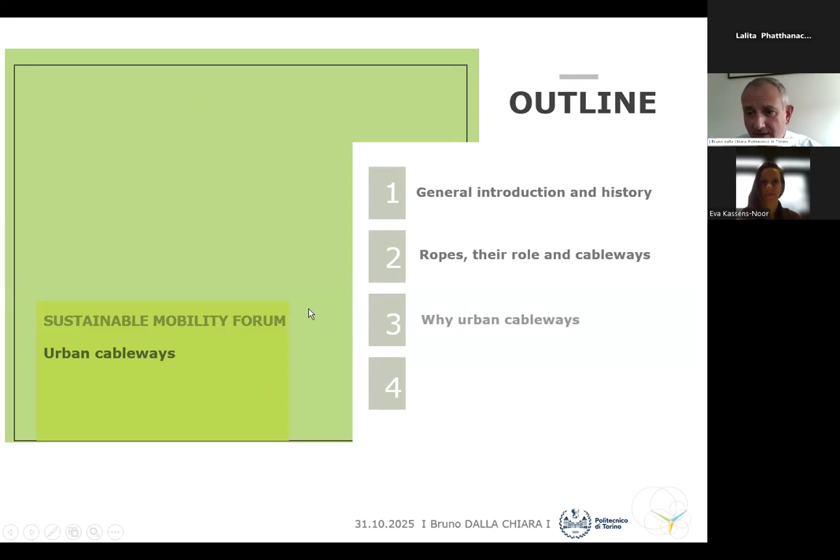The outline of today is a general introduction and history on cableways in general, then the ropes, their role and cableways, then why urban cableways, and their design. As regards the design, we will see just some first steps, because of course in this available time we cannot enter into the full engineering and design of cableways, but I will provide you some first glimpses on how their design is done.

So first of all, why should we look at urban cableways for sustainable mobility? First of all, the use of space. Our cities have difficulties sometimes to find more space, and anyway the available space is usually quite occupied by road vehicles. Then there is a question of safety, because we did not have this problem a century ago, and though we have made some improvements in our cities in the last two decades, road deaths remain one of the first causes, or the first cause, of death in our countries. So we have to look at that.

Then a third element is hourly capacity, because if we look at the alternatives nowadays, if we put aside for the time being the automated metros and conventional metros which have very high capacities but need the demand for them, then if we go underneath 10,000 passengers per hour per direction, then we have some alternatives, among which there are urban cableways.

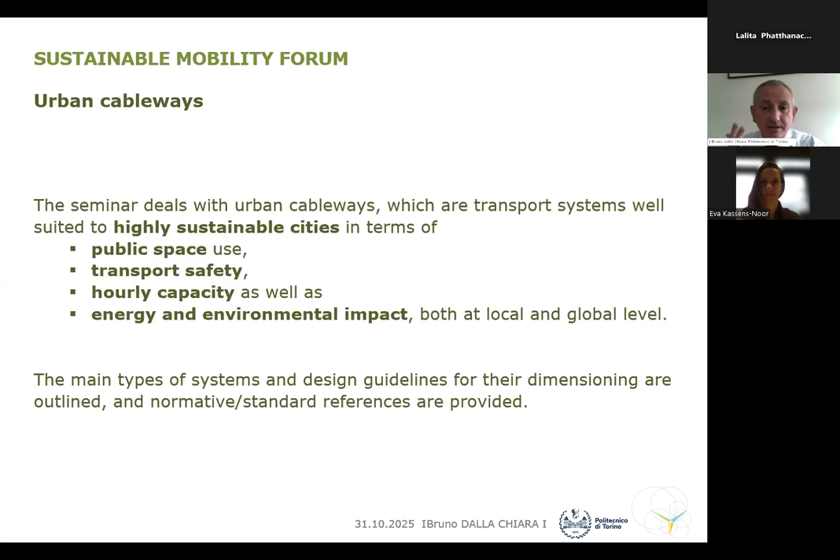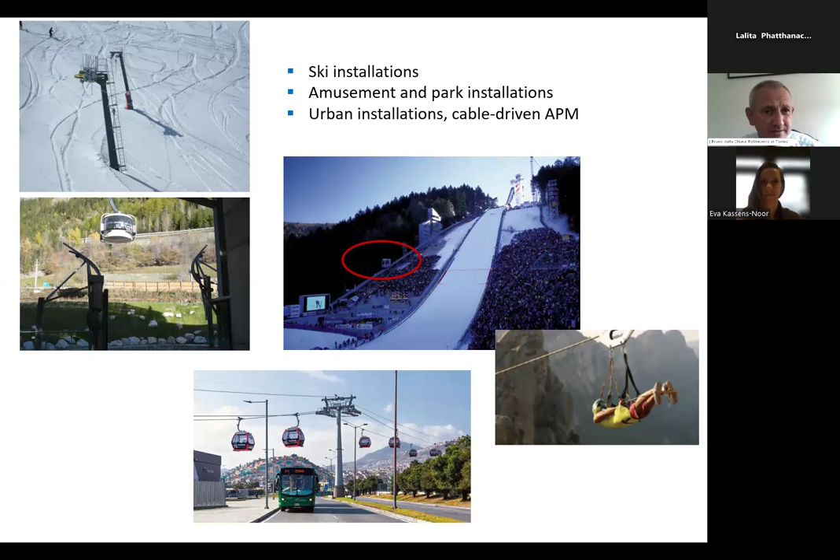Let's start from a look. We know cableways for their use in sport activities, and we know a bit less probably their application, as we can see in this slide, for urban applications. But as we will see shortly, there is already a number of them. We will concentrate on this, of course.

First of all, when cableways were born, because we have a history behind us, they were born more or less in the same period as railways, so in the first two decades of two centuries ago. In this context, in 1822, there was a first typology, a freight rope installation that was built in Verona, Italy, but soon after in Vienna, then in Germany, then in Sweden, in the 20s and 30s of two centuries ago, some applications were born.

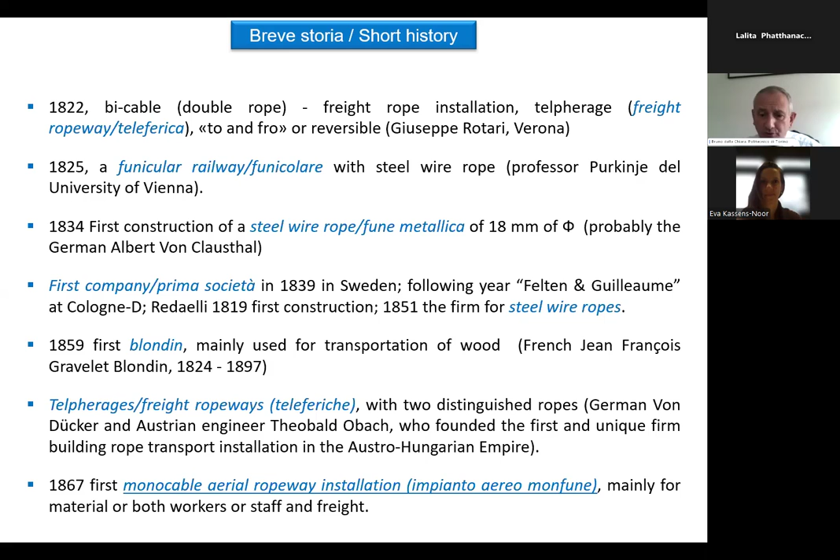In the second half of two centuries ago, some first Blondin installations dealing with freight transport, in particular of wood at those times, were installed in France. Then, starting from the 60s and 70s, we have seen the diffusion of cableways also for passenger transport. The first one was in 1866 in Switzerland. As you can see, the main countries are Germany, Switzerland, Austria, France, and Italy, which were the places where cableways were born, and still conserve a strong competence on them.

Then, as I was saying, in the two centuries ago, mainly in the first half of the last century, there was the diffusion of cableways for passenger transport, also starting from the 20s of funiculars. That means those cableways which are operated typically either on rail or on air cushion. For example, in Zurich there is a cableway for the airport operating on an air cushion, with the traction assigned to the rope. Then starting from the 80s, we have some first cableways that we will see later.

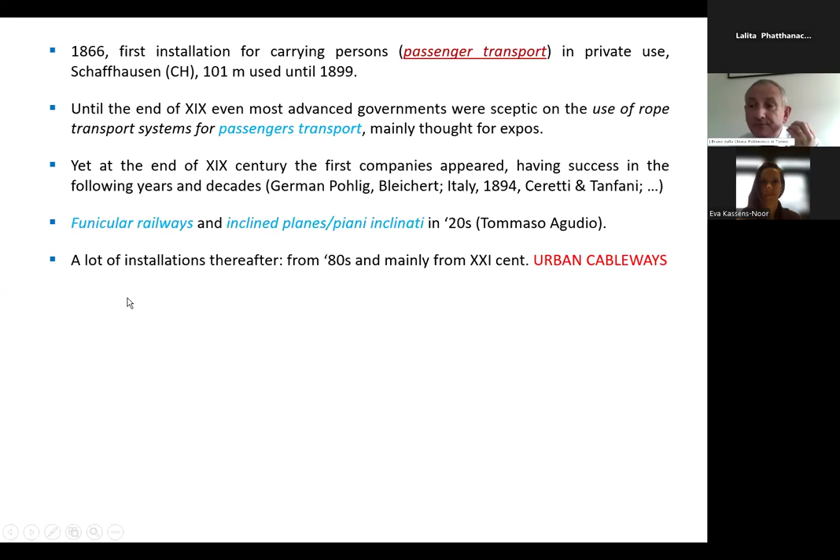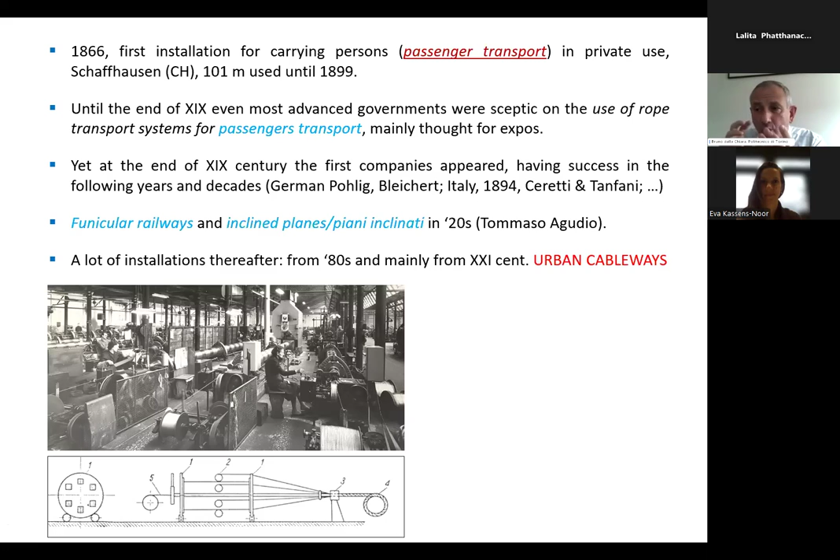This is an old company, where the ropes were made. Now the process is a bit more modern, but we still need to know how the rope is made. We start from the steel, and then, as we will see later, we arrive to a rope itself. Then let's see a short history — these are the very first aerial ropeways for passengers, from the 20s and 30s.

As you can see, there are a lot of aerial tramways already in the 20s and 30s, beside gondola ropeways. Then we had also some sledding on snow that allowed bringing skiers uphill. But there was already, as you can see on the left side, an urban cableway in the 30s.

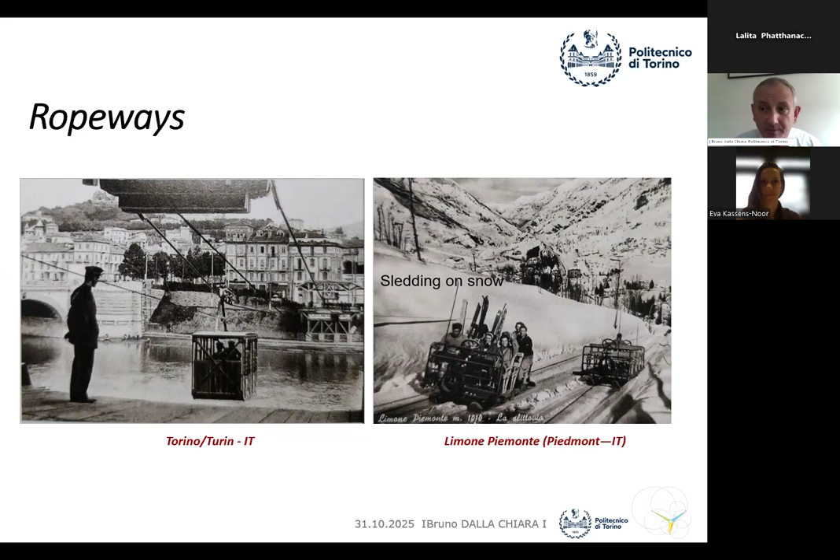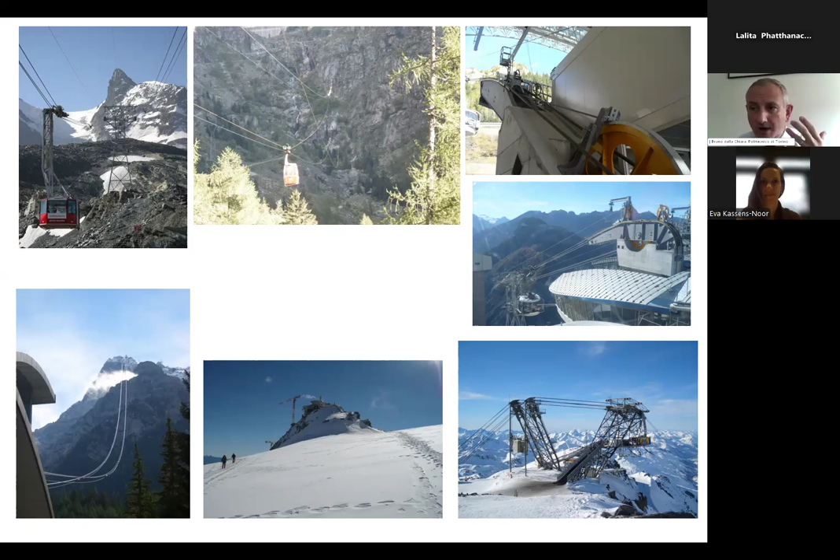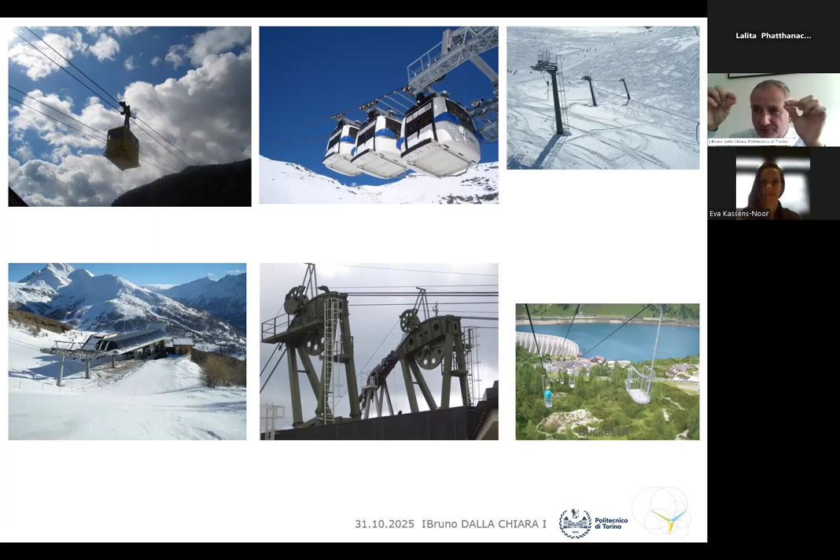As we can see here, we have different kinds of cableways that shortly we will analyze. Also the pulse, this one in the middle of the top of the slide, is a pulse. That means you have groups of vehicles which are carried together to avoid the concentration of strengths in the same point of the rope.

And now we arrive to urban cableways. So we have seen a short history, and we see some cableways operating in cities. On the top left, this is the urban cableway in Venice. It's a to and fro cableway that is represented on the bottom left of the slide.

Then on the right side, on the top, you have the one operating in Zurich, in Switzerland, for the airport. The traction is assigned to a rope, but also you can see this one in the middle part of the right side of the slide, that is in Milan, for the conjunction of a metro system with a hospital, with a very high traffic. It's always full. I've been there more than once, and it's typically always full.

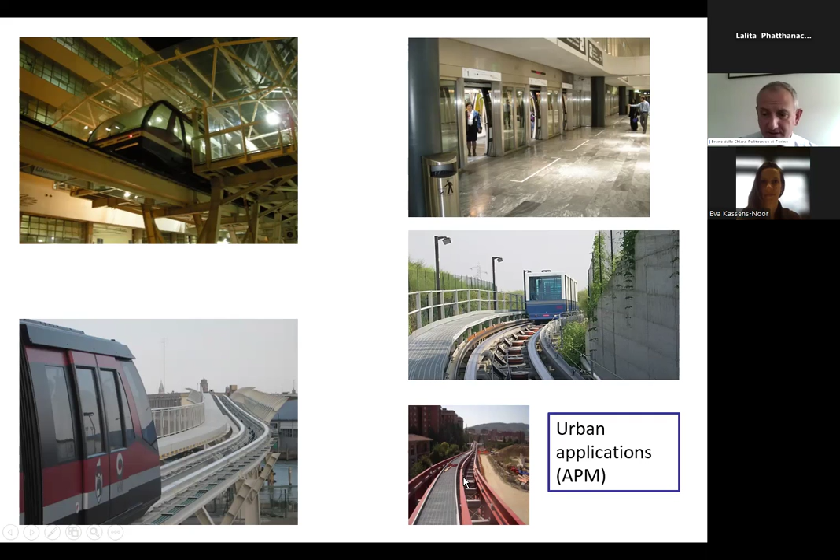And here on the bottom, there is the one in Perugia in Italy, that is an urban cableway too. But the main cableways in terms of numbers in the world are those that have been built recently in Latin America.

As you can see here, you have Metrocable in Medellin, you have Mexicable in Mexico City, Teleférico in La Paz, Bolivia, Transmicable in Bogota, and they have been increasing in the last 15 years. Typically, they are aerial ropeways with the concept of gondola ropeway.

Of course, we are dealing with cities which have not a high level of historical buildings. I mean, they don't have to respect buildings of the 11th, 12th, 13th, 14th centuries. They are more recent, but they don't cost much. They avoid going underground, and they can link in an easy way parts of the city.

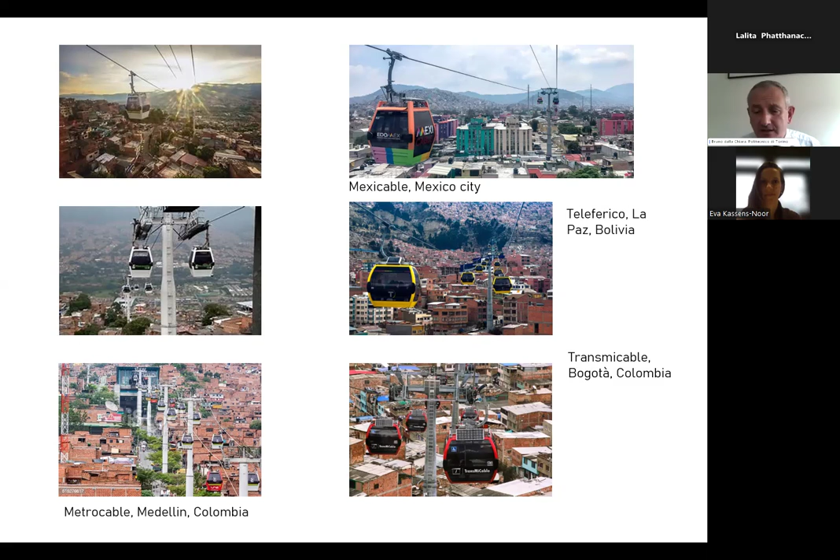In a city like Medellin, they have, if they have not increased them recently, 8 gondola ropeways all connected together which satisfy a great part of the demand, and they have built their public transport on this concept.

Consider that in the world, this is the representation of cableways for all applications, of course, not just for the urban context, which are just a few for the time being. There are 16,000 in Europe, which is where cableways have been developed and are still the main core of the industry in this context.

Because there are 2 companies which are big, plus a few which are little, which have 90% of the overall market in the world. So concentrated, very specific, but with an outreach at global level.

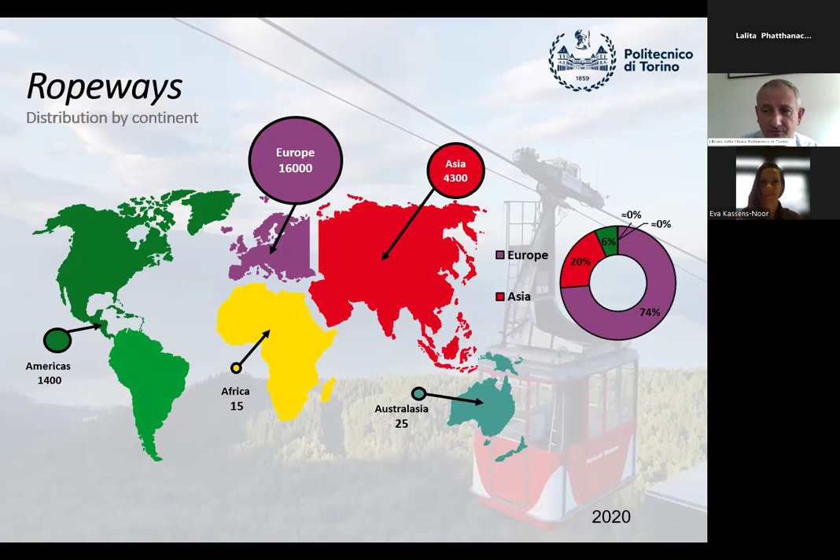In Asia, we have more or less 4,300 installations, many of which are in China, and then some others in the other parts. In Americas, there are only 1,400, but already some tens in the cities.

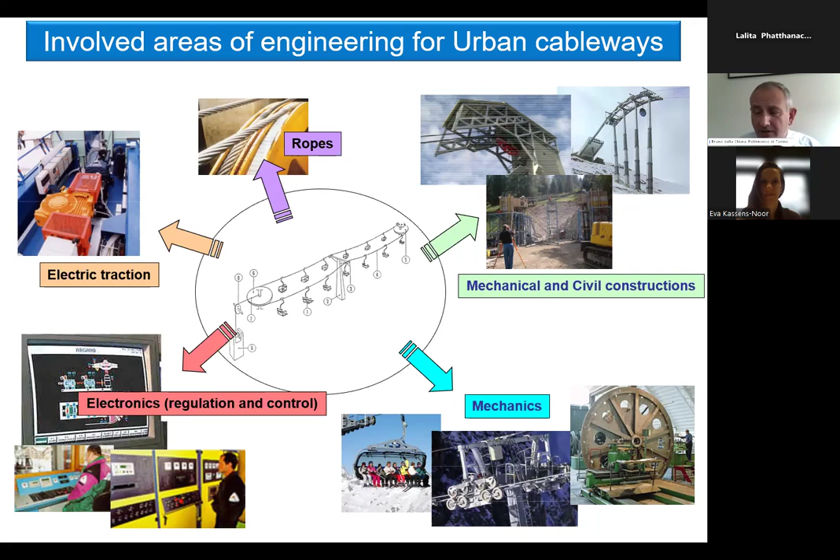Cableways typically involve a number of engineering areas: the ropes themselves in mechanical and civil engineering, electric traction, electronics, mechanics, and the buildings. So they require a system engineering approach, with also some aspects in the architectural field for the stations, their insertion in the country or on the land, and the like.

Let's start from the rope, just a very short introduction. The rope is made by a core, then there are the wires around the core, and then the strands, which when spun around the core or the internal central wire, constitute the rope itself. I won't go into construction details, but you can have different kinds of ropes, different constructions, different diameters of the wires, and also with or without the core. It depends on the application.

The core is useful for the flexibility and for the lubricants for the rope when it is in operation. But you can avoid it - you cannot have it - when you have more rigid ropes, typically for allowing the load to go from one point to another. We will see it later.

Which are the main construction parameters? This is important because it will be part of the multiple choice test. You need to know, for a rope, the diameter, the winding direction - how these wires are wound - the strand pitch and winding angle, the loss factor per spin, which is more specific, and the minimum breaking load, which is important for calculating ropes and ropeways.

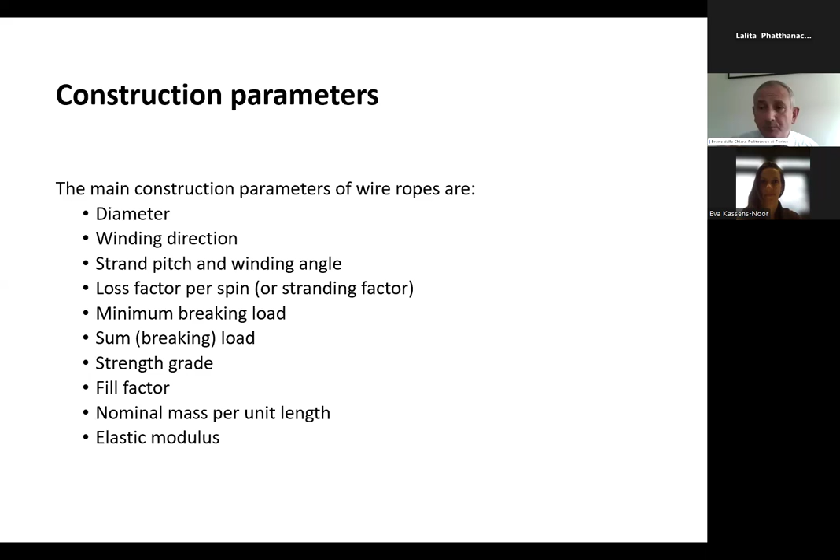The sum breaking load is a similar way for calculating the breaking load, the strength grade, that is the safety coefficient, the fill factor, which reveals how much of the section of the rope is filled with metal, with steel, the nominal mass per unit length necessary for calculating rope weight, and the elastic modulus for the extension of the rope in different operational conditions - weight and temperature mainly.

Which kinds of ropes do we have? A number, but the main elements you are asked to know are these: the carrying rope, that is static - it brings the weight, but the weight moves along it. Then the hauling rope, that is the one which is moving. But if you have just one rope, that is a carrying hauling rope.

That means you have the weight and the traction together in the carrying hauling rope. You can have two, of course, but they are two carrying hauling ropes. In aerial ropeways, like to-and-fro aerial ropeways, you have the carrying rope on top and the hauling rope on the bottom. The carrying rope is fixed and the other one allows the traction of the vehicles.

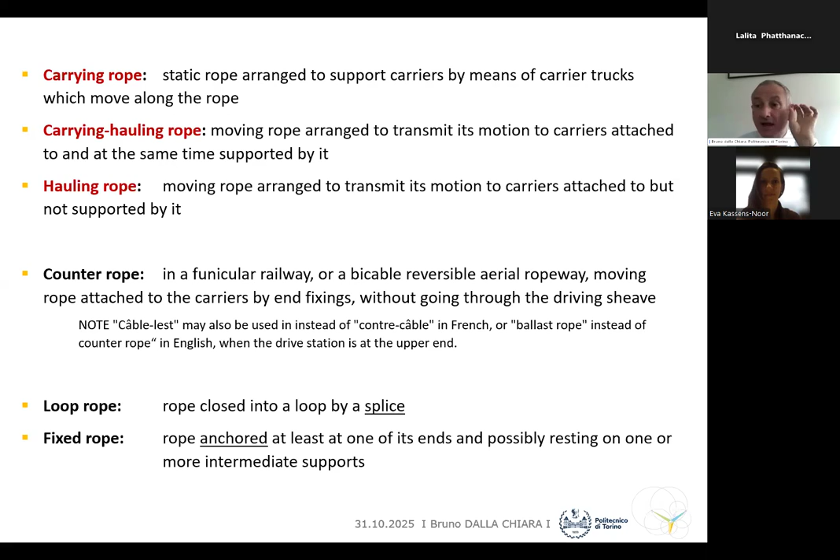If you have to close a rope, you make the splicing. I won't go into detail, but this is how you close a rope into a unique ring, typically when dealing with a carrying-hauling rope or with a hauling rope. And you are dealing with a fixed rope when it's anchored, which is typical of the carrying ropes.

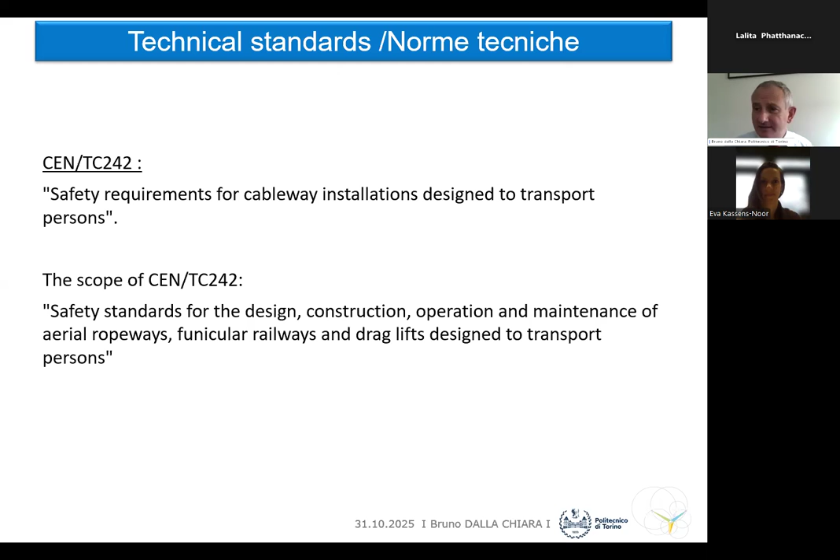Is there a technical standard? Yes, at European level, at the beginning of this century there was huge activity by companies, operators, and ministries to have a unique approach to design, operation, and maintenance of these installations, also for some first urban applications. This was done within CEN and Technical Committee 242. There is a list of standards - each part of the ropeway, of a cableway, is related to a standard.

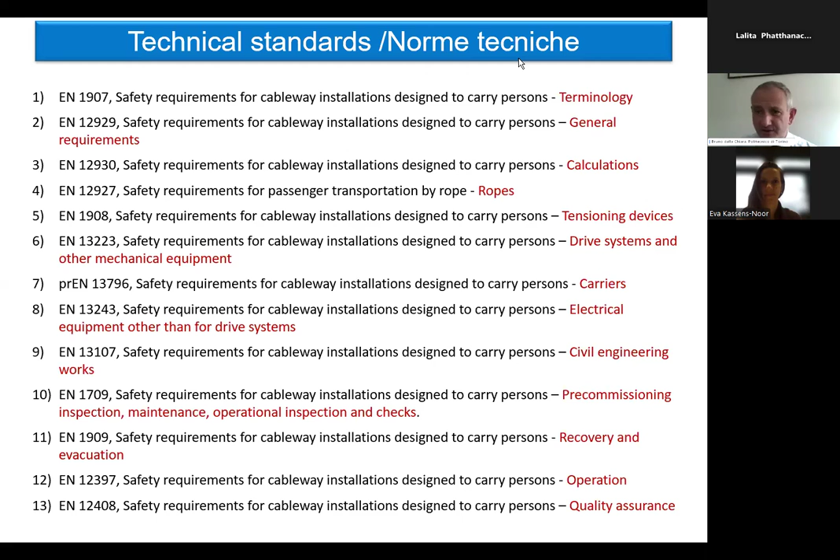There is the terminology, general requirements, calculations, ropes, tensioning devices, drive system, carriers, electrical parts, inspection, maintenance, operational inspection, recovery, evacuation, operation, quality assurance - all the components and activities from engineering to maintenance and normal operation are under the control of technical standards. And they are homogeneous because they've been agreed at European level.

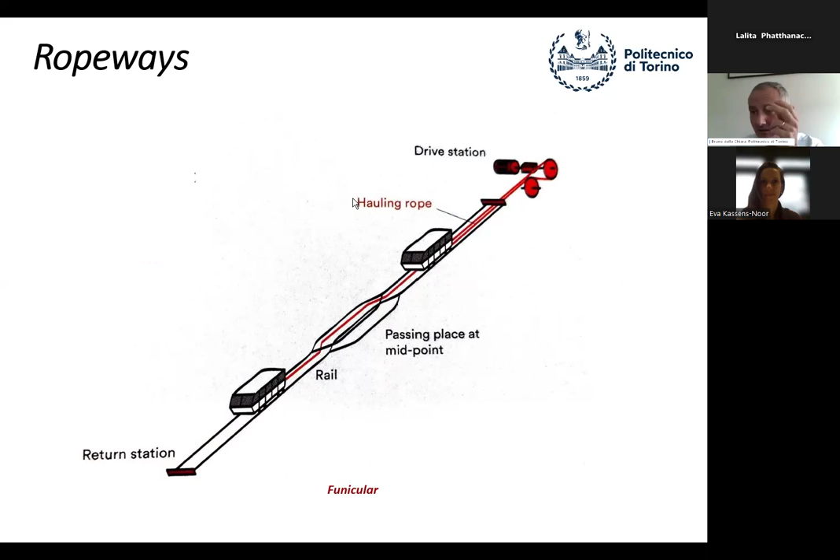Let's see some applications in general terms, and then we'll look at those which are typically urban. What you see now is a funicular. It is very simple - typically the vehicle operates on railways, with a drive station on top, or at an extreme if you're on flat terrain, and then you have a hauling rope. If it is a to-and-fro system, you have a passing place at the midpoint for crossing the vehicles, so just one rail with a crossing in the middle.

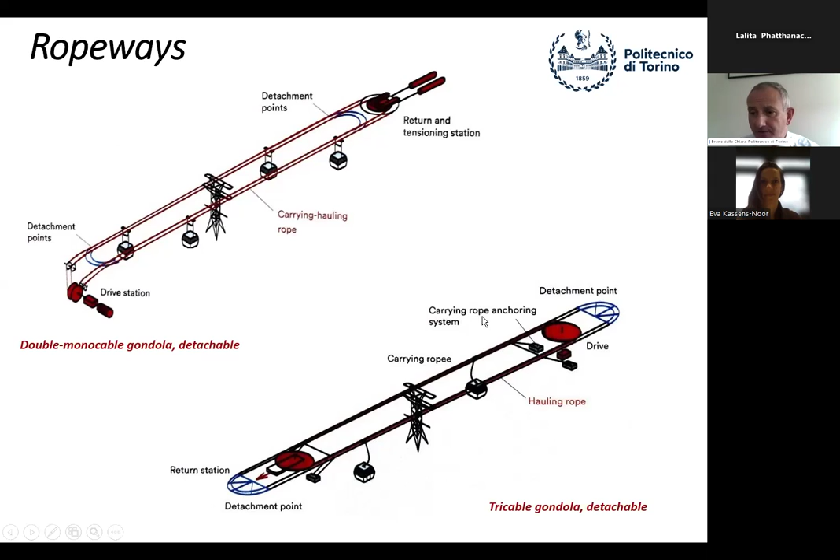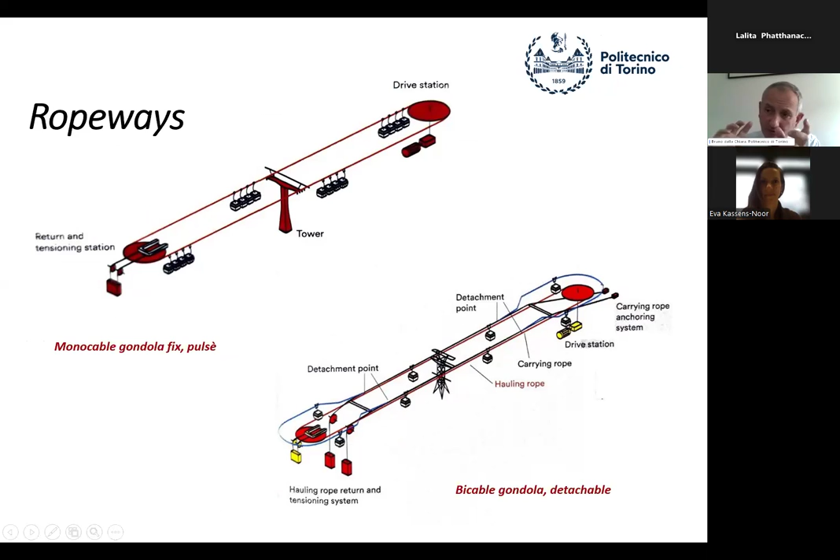Then you can see a monocable gondola lift with fixed grips and pulsed operation that I showed before, where you have groups of vehicles and a monocable installation with towers along the line, as you can see, or a bicable gondola detachable. Again, when you arrive at the station, the vehicle is detached with an automatic grip for reducing the speed and then reaccelerating. Then here you have an aerial tramway.

Consider that all these installations typically have an electric motor, so you don't have local pollution, and the power is concentrated in one station. This means that you don't have to bring with you the motor like in typically all other transport systems. All vehicles typically have an internal combustion engine or an electric motor on board - they have to bring with them the tank or the battery and the motor or the engine.

Here it's different because we have the motor, an electric one, which is in a station. And then the movement is assigned to the rope or ropes, which have a very low inertia. So from the energy point of view, this is the best solution - not because I'm speaking about this, but because you don't bring with you masses like engines, motors, tanks, batteries, and you assign that to the rope, which has low inertia. So if you look at the energy consumption, as we will see later, this is the best option.

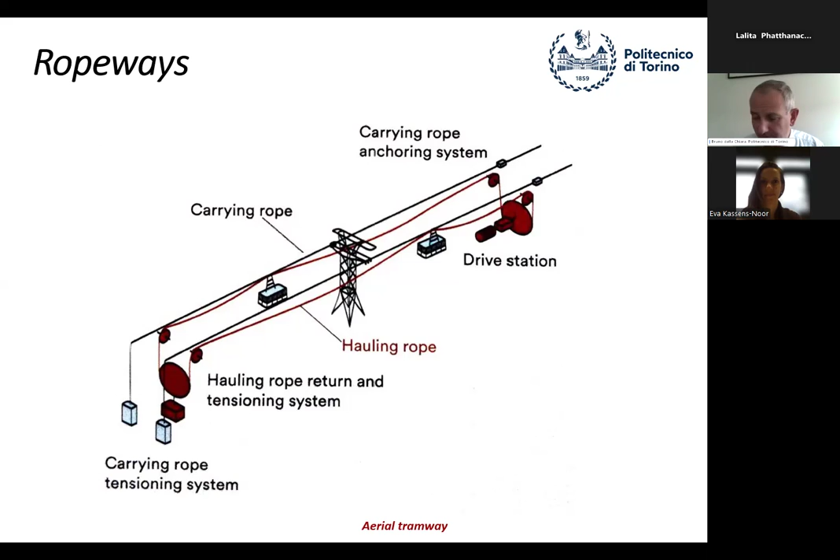Okay, so having made this very short recall of the installations, let's concentrate on automatic people movers with cable traction, that is cable-driven APM.

Typically, they can arrive to the maximum speed of the aerial ropeways that we have seen before, or the funiculars, which have 12 meters per second, and in the recent normatives, they have arrived to 14. You multiply by 3.6 and you have the kilometers per hour. So let's find an alternative transport mode for a city which has so high a speed.

You don't find it. It's very difficult to find one. Well, you could have a bicycle which is very, very fast because it hasn't got any obstruction and could, of course, arrive to higher speed. But it's difficult to have so high a speed in a city.

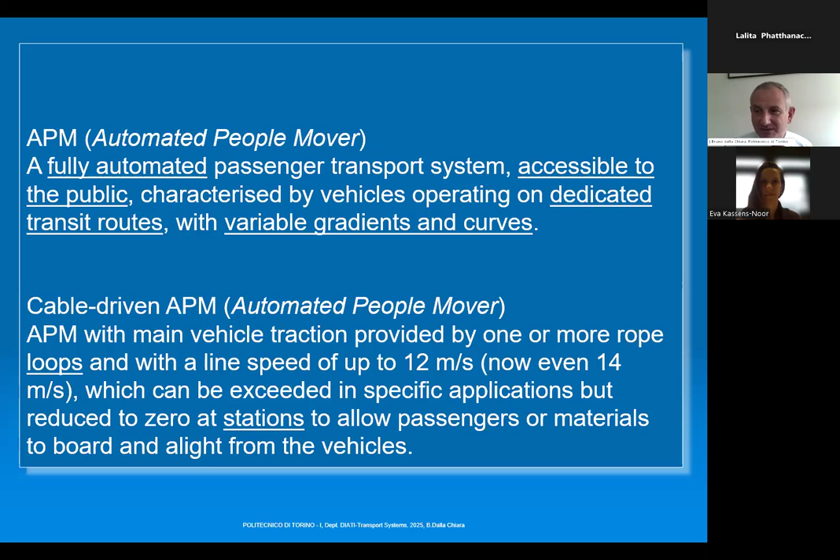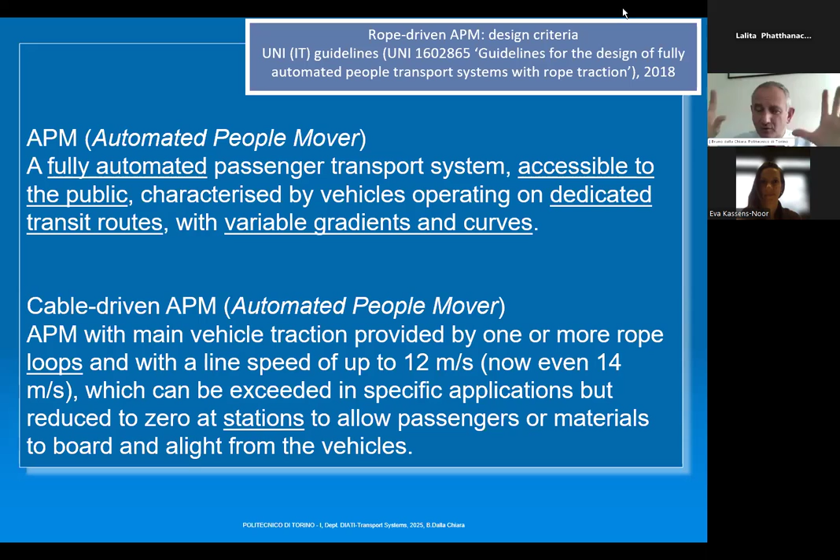Okay, there are normatives, but there is only one guideline that was prepared in Italy a few years ago - the guidelines for the design of fully automated people transport systems with rope traction. And they are the only ones existing in the world, except a sort of standard by ASCE in the United States, which is very practical. It is not the more general approach that we typically have in Europe.

Okay, where do we allocate these installations in terms of capacity? Around here, that means some kilometers, but you can create some sequences of them, and a hourly capacity between 1,000 and 9,000, more or less, passengers per hour per direction.

This is very competitive with respect to buses, tramways, and conventional public transport. It's less than automated metros, which typically start from values of 8,000 to 10,000 passengers per hour per direction.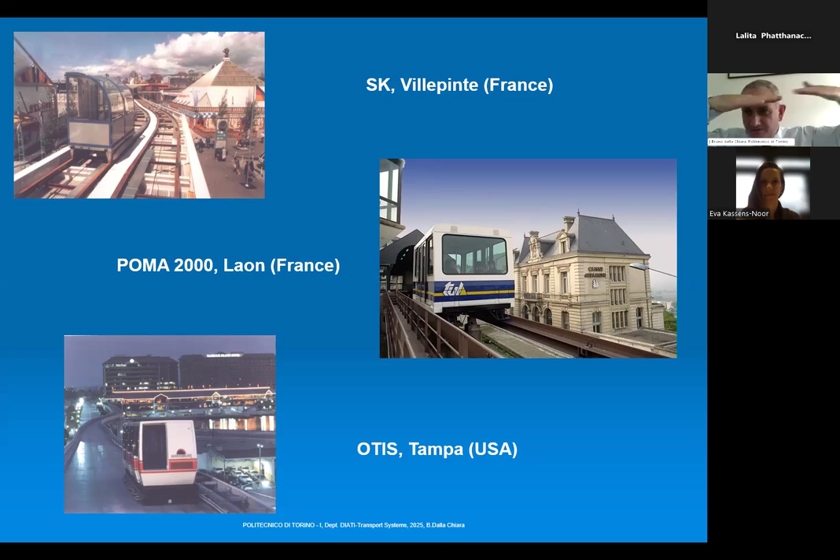Given this, let's see other applications, and then we will see the more technical parts. This is the one in Milan, which creates links between an underground station and a park and ride area with a hospital, a very used hospital, so thousands of people go there each day.

And this on the bottom is the one operating in Perugia, in the middle of Italy. It starts from a railway station and arrives at the exact central point of the city, passing outside at the beginning, then entering a tunnel into the city and arriving at the top. Perugia is on top of a little mountain, a hill.

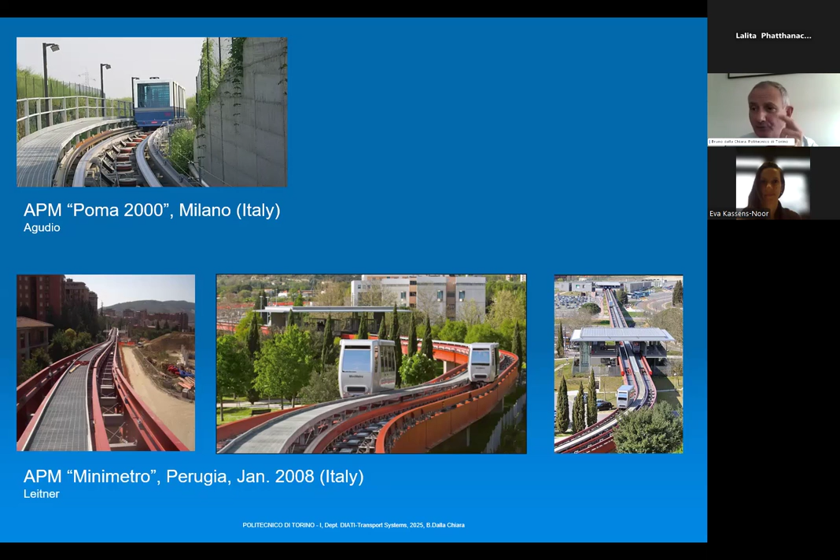And here you see the Pisa Mover, for the airport of Pisa, from the center of the city, near the railway station, linking to the airport. You can arrive in a very short time from the center of the city. It has a length of just 1,760 meters with a capacity of 1,150 passengers per hour per direction, and the vehicle can host 107 people.

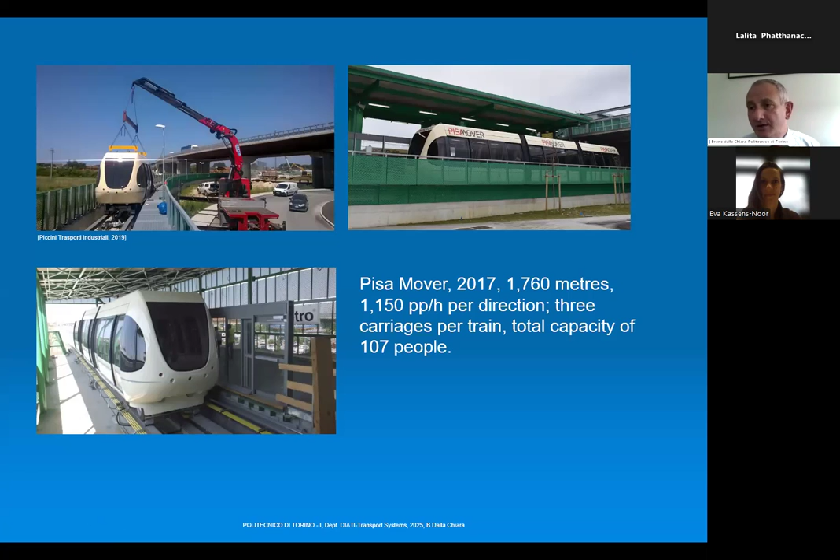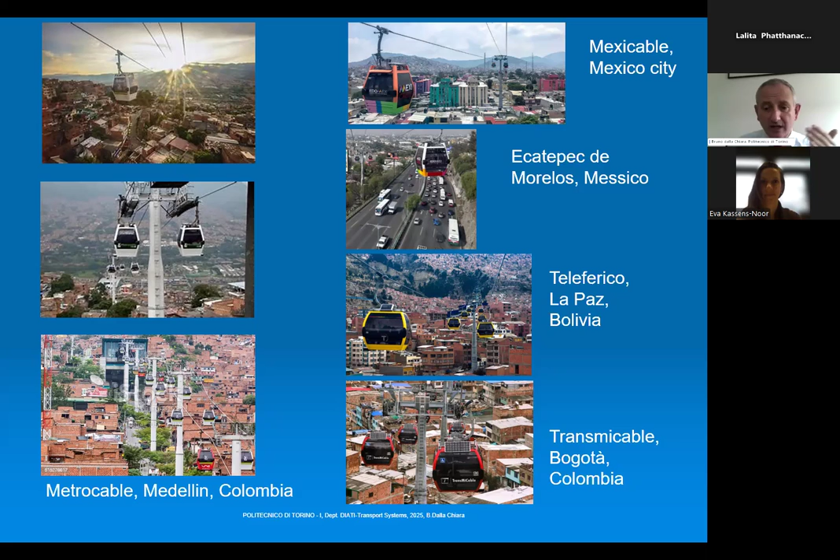And here you see all those installations present in Latin America with their different roles and applications, typically in cities: Morelos, Mexico City, La Paz, Bogota, Medellin, which I mentioned before, and also these in Tolosa and Santo Domingo.

So there's already a number of applications, and in particular in Latin America, there's been an increase in the installation of urban cableways. Consider that 15 years ago, a student of mine from Colombia came to Turin to study cableways and then went back to his country. This is the development, not only for him, but surely he has pushed this development a lot because now he's a leader in this context.

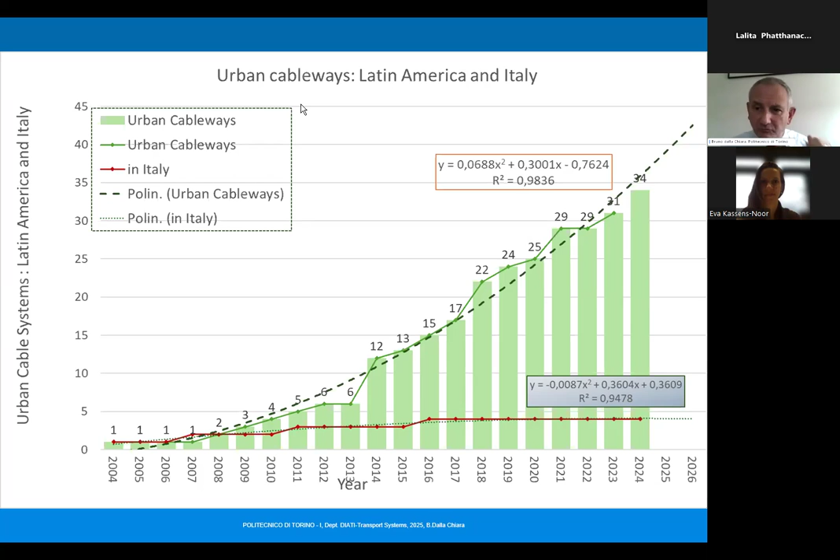You can see that in 15 years, more than 30 cableways have been built, and now there are 3 or 4 under bid. So quite a great diffusion. And more recently, in 2023, both London and Paris decided to use a cableway, so these are the applications for these important cities in Europe.

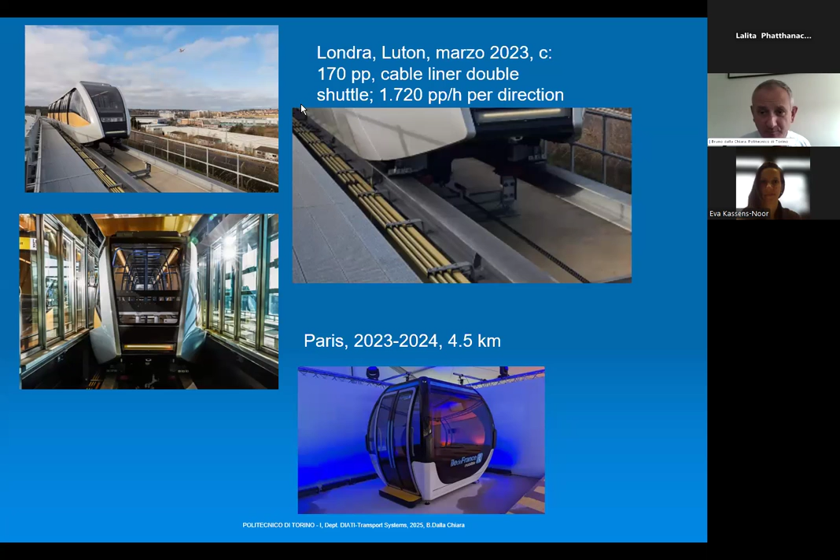There's also a very recent possibility to create a hybrid solution. What does this mean? Typically in ropeways, the traction is assigned to the rope, and the engine, or electric motor, is in a station. But what about avoiding the need to reduce and increase speed in the station using all the electromechanical parts? You can assign it to the vehicle itself, with 4 little electric motors.

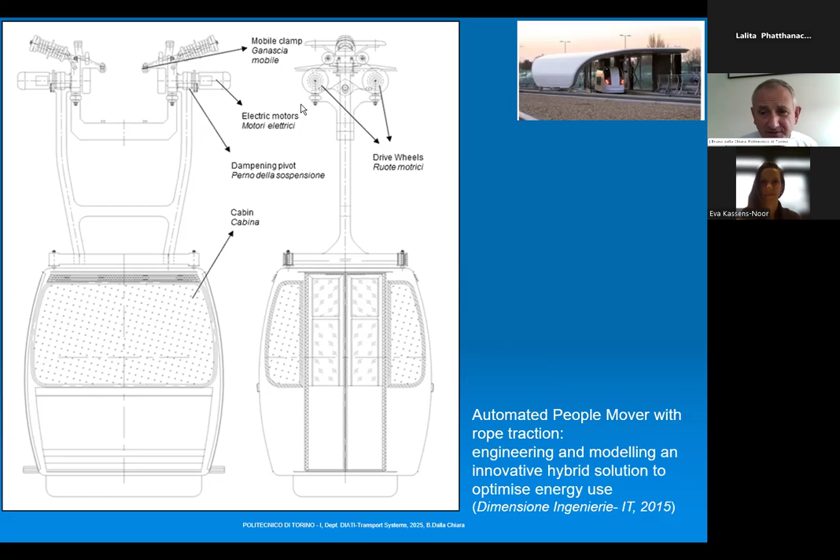And of course an energy carrier like a battery or supercapacitors, that allow you to store some energy on the vehicle and then accelerate and decelerate by itself, leaving the traction to the rope. This is a hybrid solution, already applied in Switzerland 2 years ago. These are the typical grips of this kind of ropeway. As you can see, there are some little electric motors on the grip that typically are not present, because, as I said before, all is assigned to the rope.

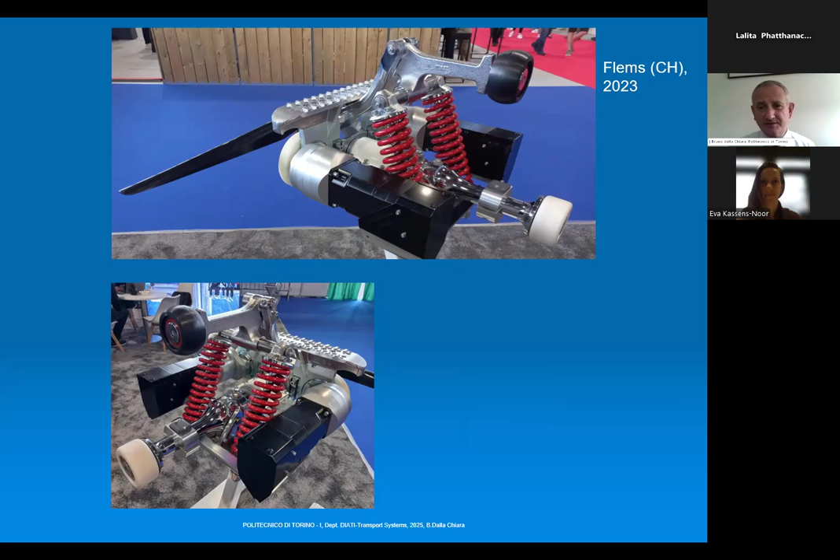This has been applied in Switzerland, as I said before, two years ago. So why should we adopt an urban cableway?

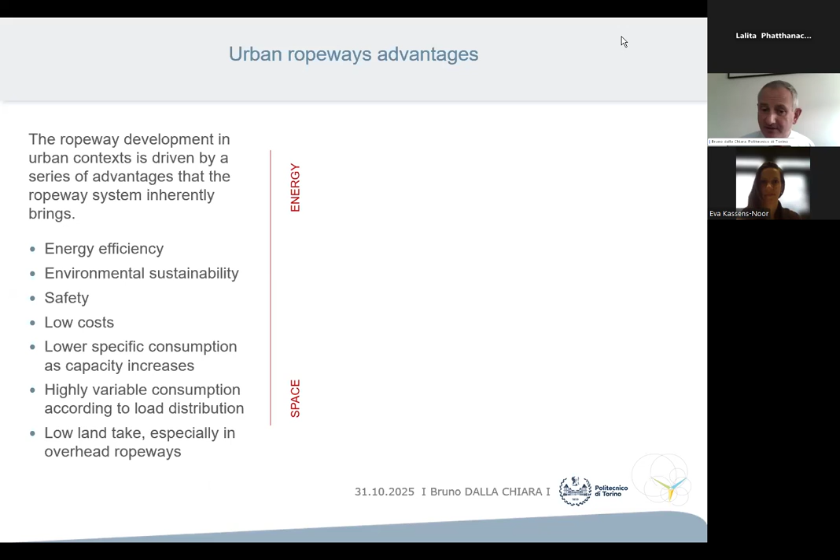Energy efficiency, environmental sustainability, safety, and low costs when compared to equivalent alternatives, equivalent in terms of hourly capacity, lower consumption as capacity increases, and low use of space.

Here we can see some numbers. If we take a battery electric vehicle as comparison, typically the best option in terms of efficiency, not necessarily in terms of well-to-wheel, as we discussed in previous lessons. Not from the overall energy point of view, but at the local vehicle level you have an electric motor which is very efficient. So taking that as an alternative, it's 0.11 to 0.20-0.25 kilowatt hour per vehicle kilometer.

A railway consumes 0.04 to 0.09 kilowatt hour per passenger kilometer, and a ropeway 0.027 kilowatt hour per passenger kilometer along a section, though traction alone can be as low as 0.02. Of course there are different applications and different energy consumptions, but this shows it's the best solution in terms of energy efficiency.

What about space? A car typically implies 5 square meters per passenger, and twice that for the vehicle. Public transport allows 4 or 5 passengers per square meter, meaning 0.2 to 0.25 square meters per passenger, and a bicycle about 0.2. A people mover fits within typical public transport figures.

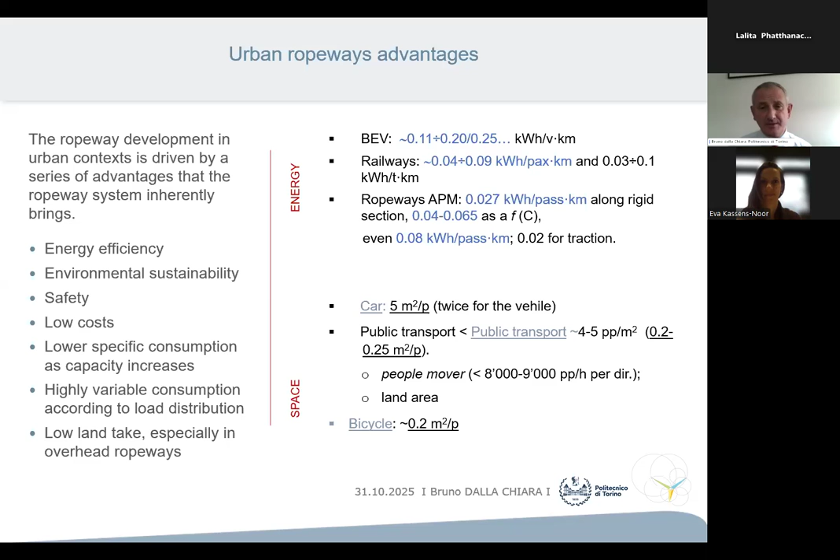It's very interesting. And then what about the role of the cities? Maybe you know that 100 cities in Europe have declared their carbon neutrality goal by 2030. Among these is Turin, so we are quite involved. Here you can find the list of these cities.

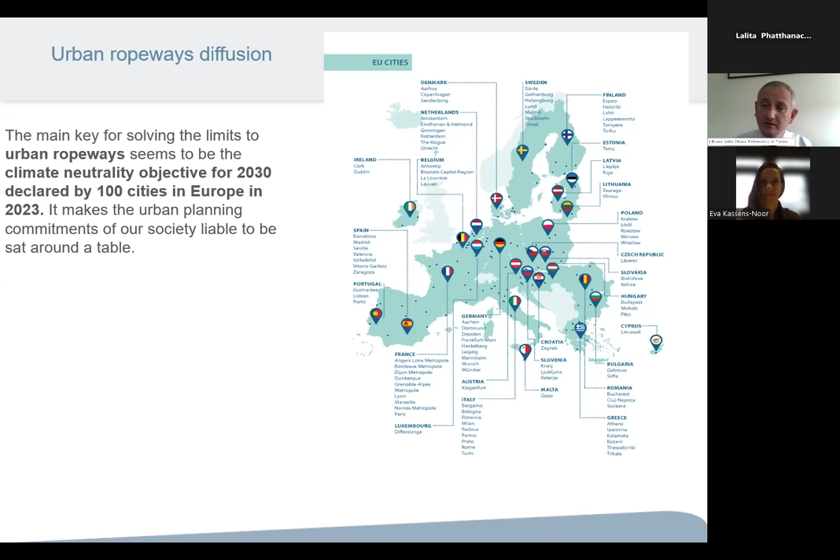As you can note, all of them have an important commitment to reducing the impact of urban mobility in terms of local pollution and global emissions. In this context, they are closely related to the sustainable goals regarding environment, pollution, and also safety.

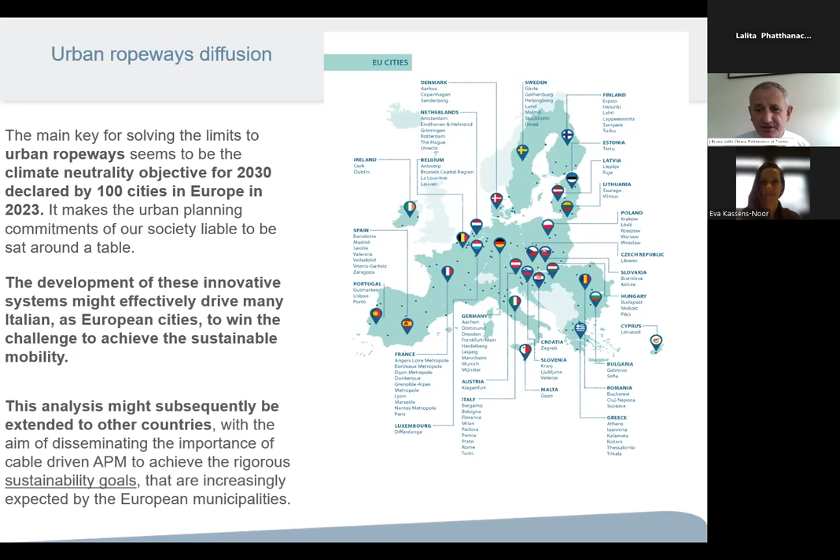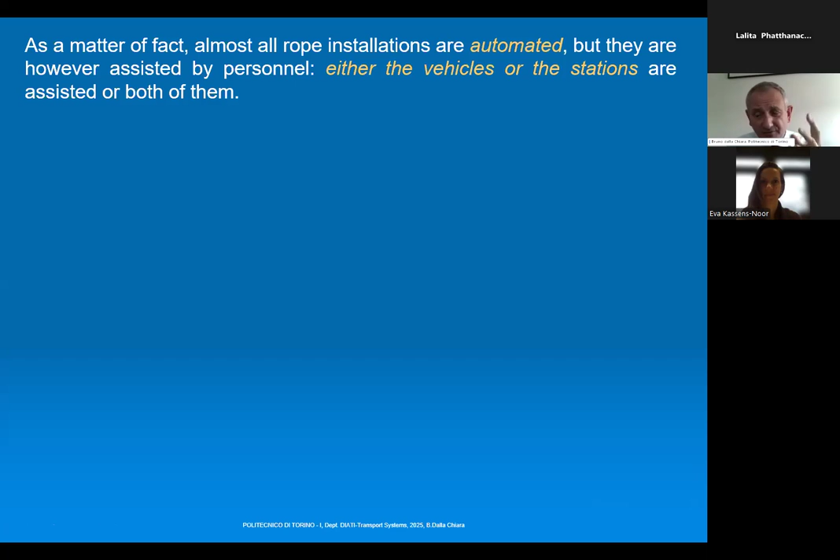So let's look at the more engineering elements of an automated people mover. Is there a methodology? The guidelines I mentioned before provide one, but let's see the main elements. First, an automated people mover is automated, so it doesn't require staff besides passengers in the stations and on the vehicles.

This means you have a control room, like for an automated metro, that controls the whole line and all vehicles with video cameras. From the procedural principles, we follow the typical approach of cableway design, and there is already some experience, though not widely diffused.

Some pictures again of control rooms, one in Zurich, one in Milan, and this instead is a funicular, a more conventional ropeway.

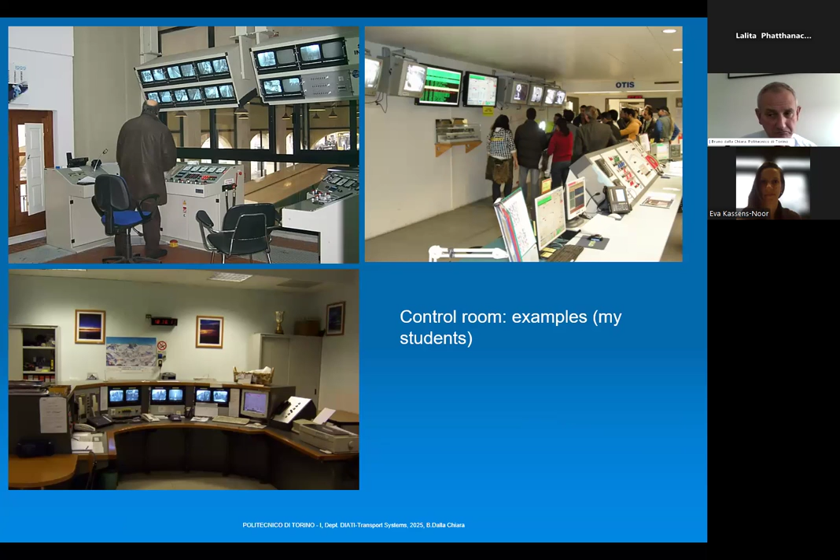So what about engineering and design methodology? First of all, we have to define the plant layout. The plant layout relates to the distances we have to respect with reference to buildings, existing networks, and any obstacles along the line.

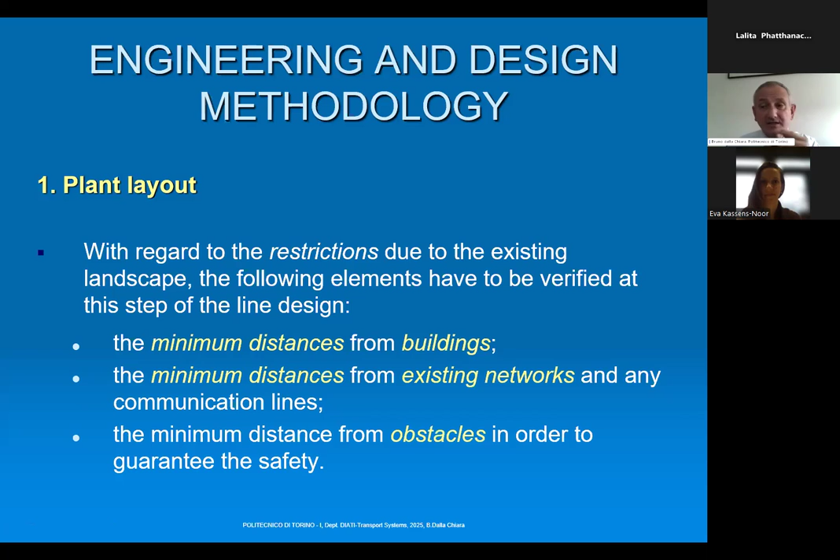From this point of view, the rope is very interesting because it's very flexible. You don't have to respect the constraints typical of rails, which don't allow very small radii, because you have to respect certain features of railway transport. Instead, in urban cableways you can have turns and adapt to the context, provided the rope is straight from one point to the other.

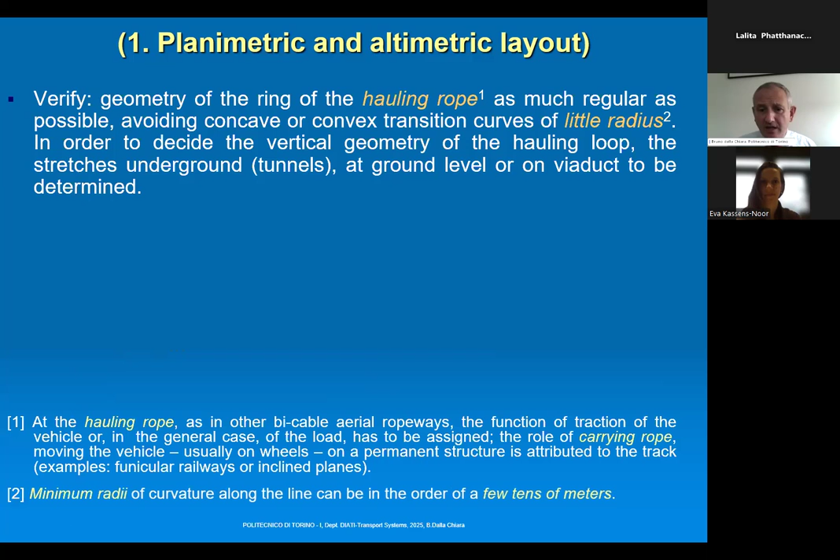The hauling rope is typically calculated as for other cableways, and small radii allow for just some meters or a few tens of meters. This also allows placing stations wherever you prefer, with a certain flexibility.

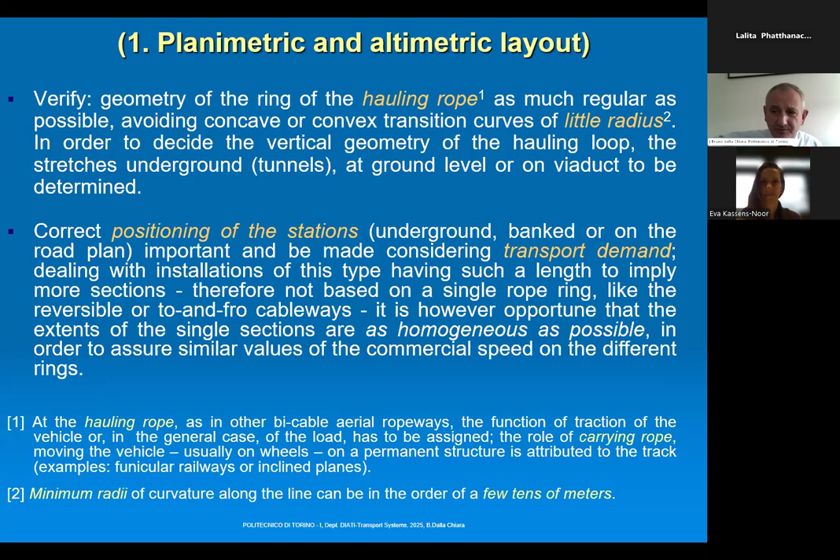What we have to take a look at when we design is that we can have the track either in trench underneath the terrain, or in tunnel, which would be very expensive. In trench could be affordable, or in a viaduct, or aerial, which is the most attractive in terms of use of space, because you don't use space except for the towers and the stations.

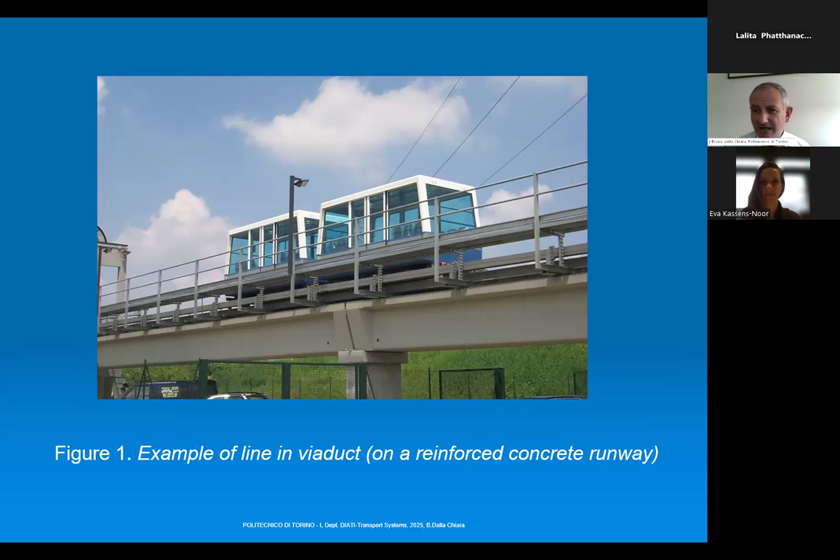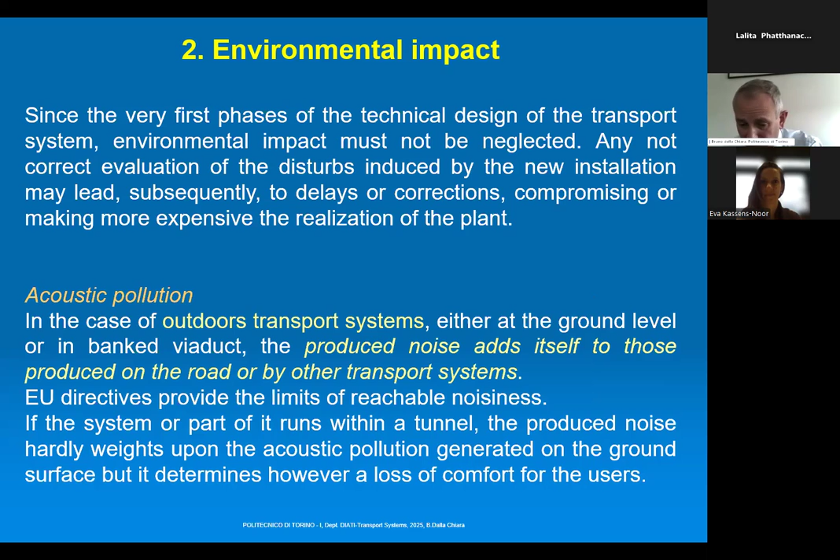So the aerial ropeway allows you to avoid the use of the soil. From this point of view, we have to take a look at the environmental impact of these urban cableways. First, acoustic pollution: we don't have any engine or motor on board, so you have just a very low noise, imperceptible from a certain distance, less than 30 decibels. What about vibrations? Again, very, very low with respect to those provided by tramways and metros.

Visual intrusion could be an obstacle, because somebody says, well, in our historical city, I wouldn't like to see an aerial ropeway. But it's also true that if you have an aerial ropeway that is really aerial, you just have the ropes, and a vehicle passes only when necessary.

We also have some very clever solutions. I don't know if you've ever been in Japan, but the bathrooms have glass doors. You can see inside when they're empty, but when there is somebody inside, the glass door becomes dark and you cannot see anything inside. The same can happen for cableways, because if they pass in front of buildings, then you cannot see inside the buildings. This is a possibility.

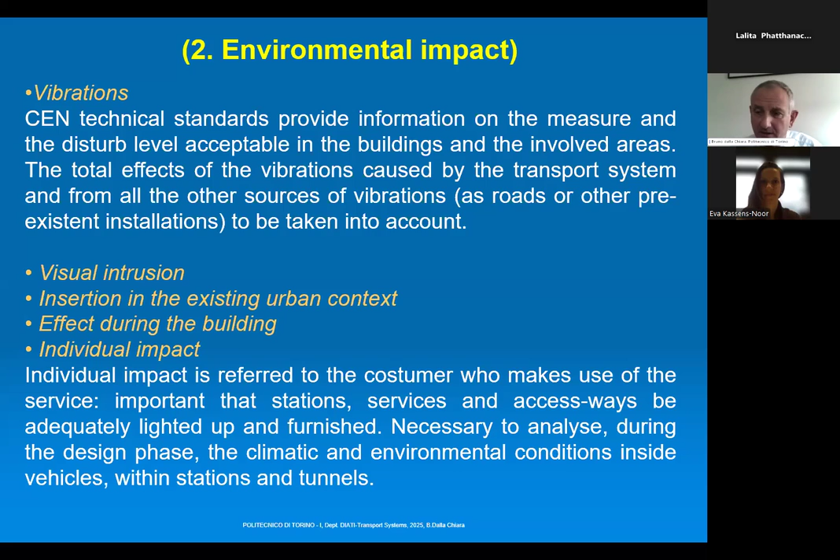The possibility to insert this into the existing urban context is very high, because, as I said before, it's very flexible and you just have to place the towers. During construction, it's not so relevant in terms of impact as it can be for a traditional or conventional metro system. I'll skip the individual impact because it's secondary in this case.

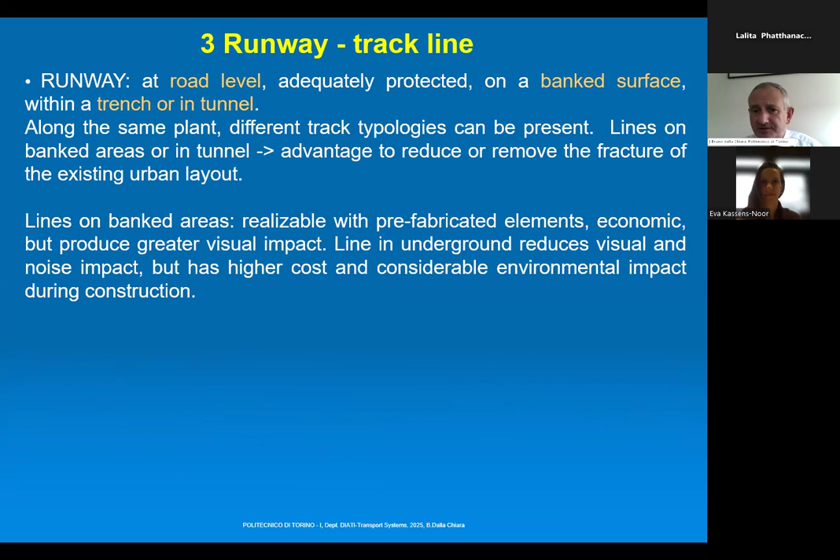What about the track line? As I said before, it can be at surface level, in trench, in tunnel, or aerial. So once you define how the vehicle is moved, then you can define how the wheels are made, in steel or with rubber, like a conventional wheel.

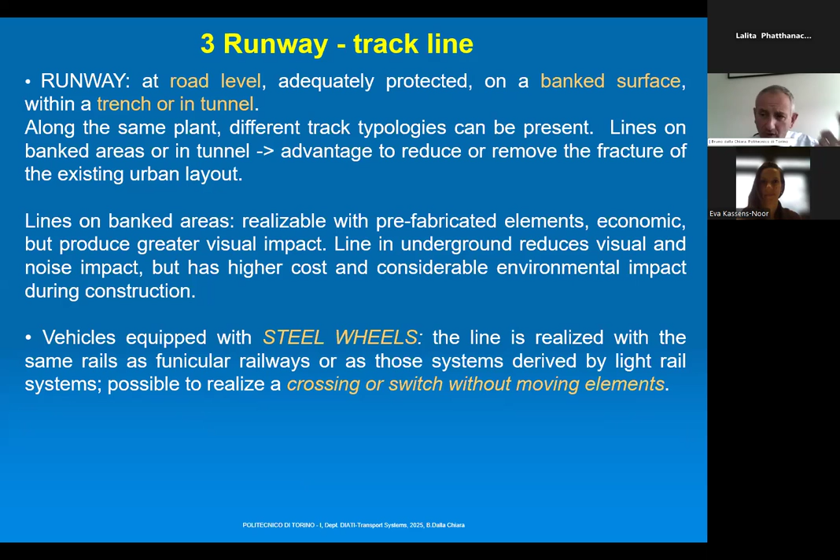In the case of steel, you typically have some components like this with an external wheel with a double wheel flange, which operates as a guide. One wheel has to follow a certain path, while the other one allows you to steer, to go to another path when needed.

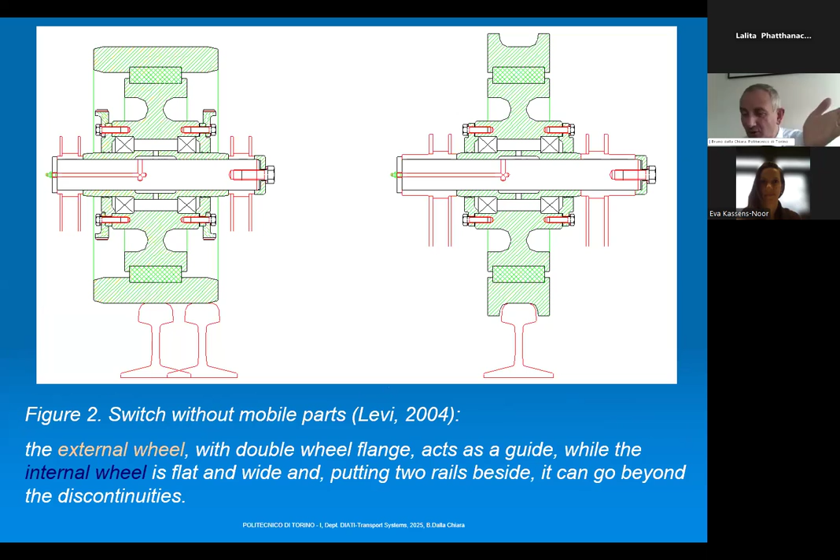As regards the alternative, it's typically rubber wheels. There are a lot of urban applications with rubber wheels, of course when they are on the terrain, but if they are suspended, they don't need these rubber wheels.

There are some applications with air cushion or EMS, electromagnetic suspension, but that's just theory for the time being. I've never seen them, notwithstanding that there are railway applications with electromagnetic suspension, which is the basis of hyperloop and magnetic levitation, with many discussions about them, but we'll speak about this aspect in another seminar.

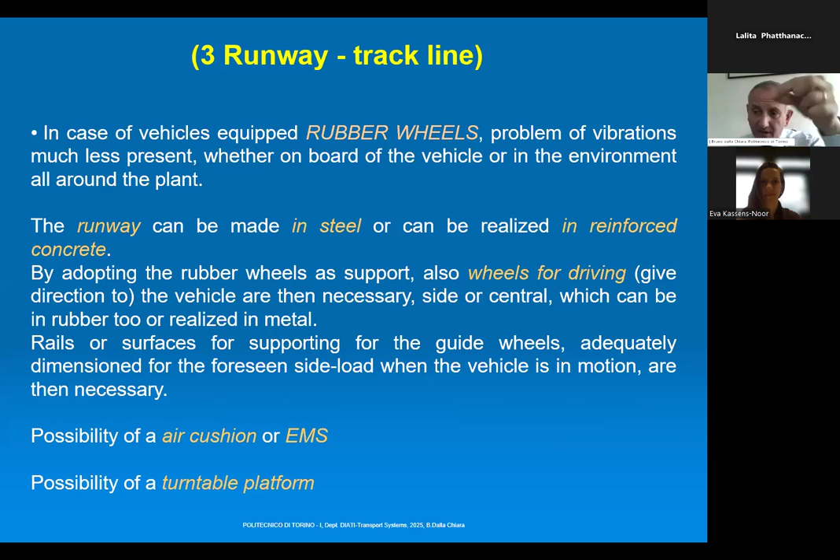There's also the possibility in this kind of installation to have a turntable platform at the end of the circuit, where when you arrive at the end, it can turn the vehicles around. This is quite interesting because they are typically little vehicles.

What about evacuation and passenger recovery? Since we're dealing with urban applications, we need an aisle for emergencies, an evacuation pavement with a certain width, and we need staff ready to help in case of need.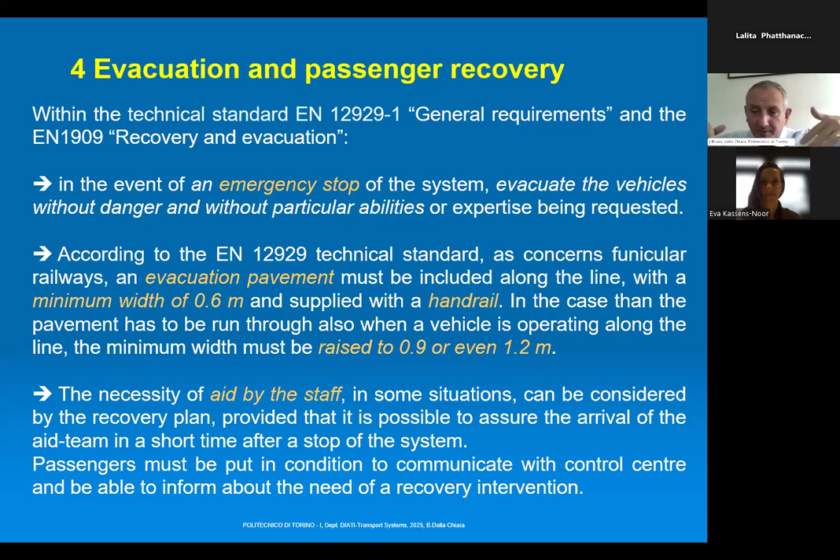But this is normal in cableways operating on mountains for ski resort areas. They operate in the same way: there are skilled staff who work nearby, and in case of emergency, they go to intervene on the installation.

As regards the station, these are typical of civil engineering and architecture, and they have to respect some general criteria typical of automated metros. In fact, in this case, we rely on normatives on automated metros, with in particular the double doors where the vehicle arrives at the station. So there are the doors of the vehicle and the doors of the station, because you have to avoid the entrance of passengers on the line.

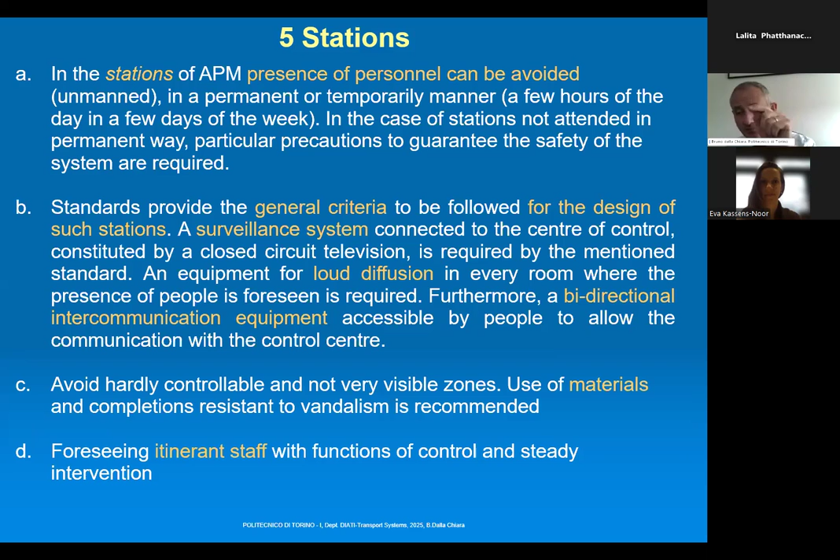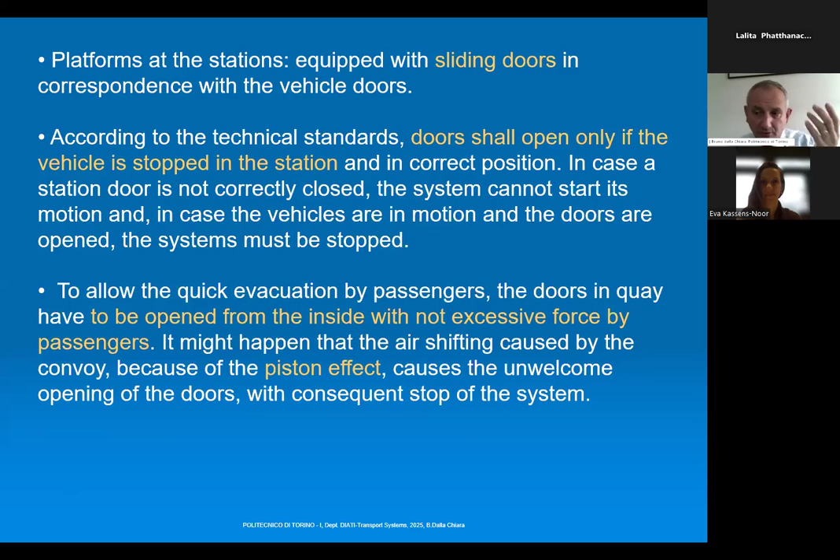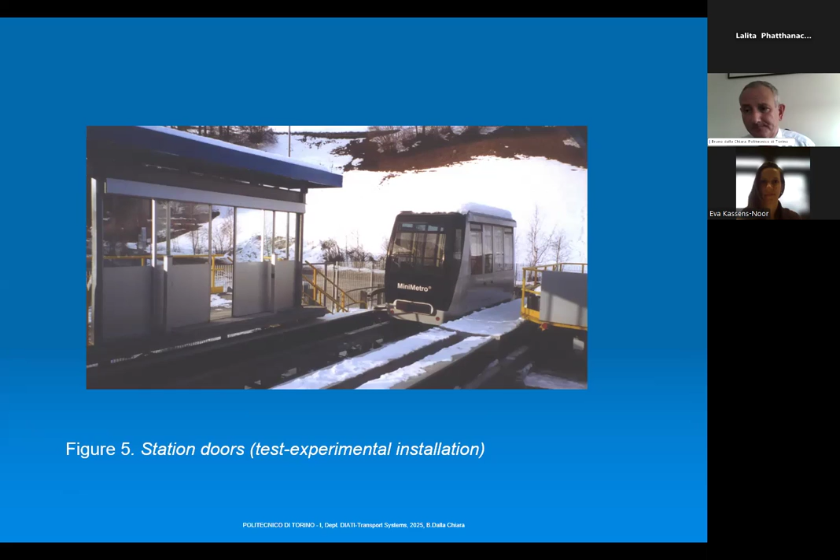When you calculate these lines, you have to guarantee the appointment of a vehicle within a ring with the subsequent ring in case of to and fro systems, like in aerial ropeways. So you have to calculate the time on a ring, and this starts typically on the most extended ring. Then all the others will be adapted according to that.

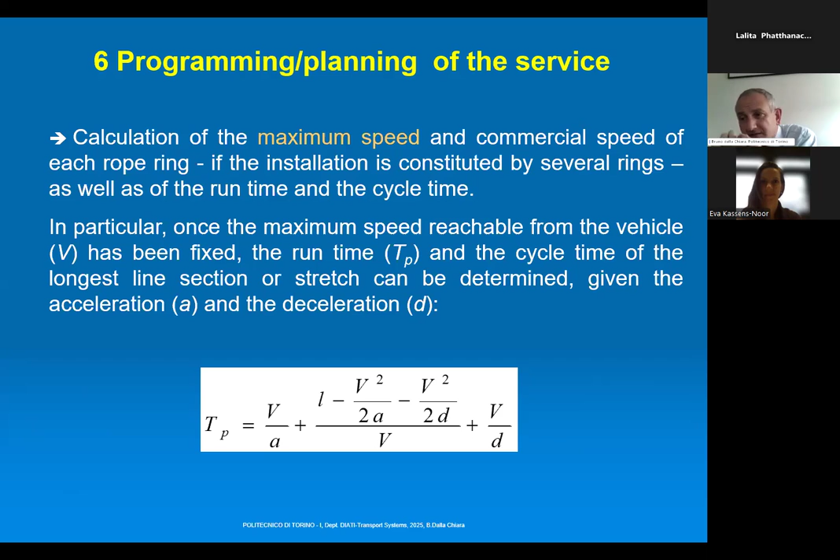You will vary the speed in order to have the same vehicles on, I mean, when a vehicle leaves a ring, it has to attach with the grip to the subsequent one. So the runtime in all the sections, from one station to another, has to be the same.

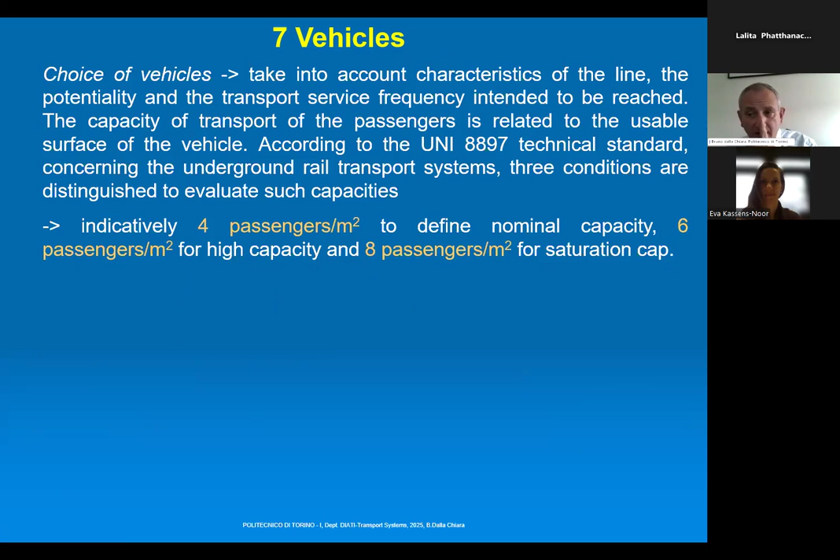Then, as regards the density, it's the one that we have seen before. So 6 passengers per square meter, though we calculate them for 8, because we have to consider higher weights for any reason.

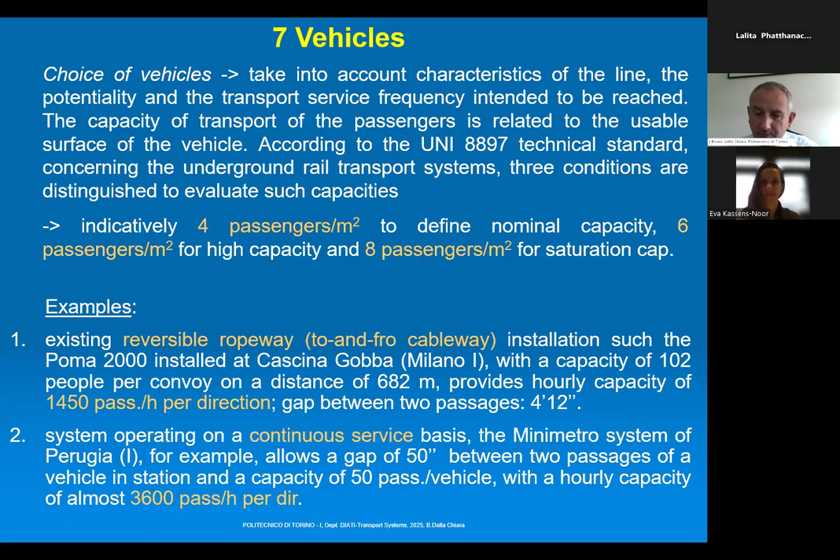If we look at some examples, the one in Milan that I mentioned before has something like 1,450 passengers per hour per direction, while the mini metro in Perugia has 3,600 passengers per hour per direction. Nowadays, we can arrive to 8,000 passengers per hour per direction.

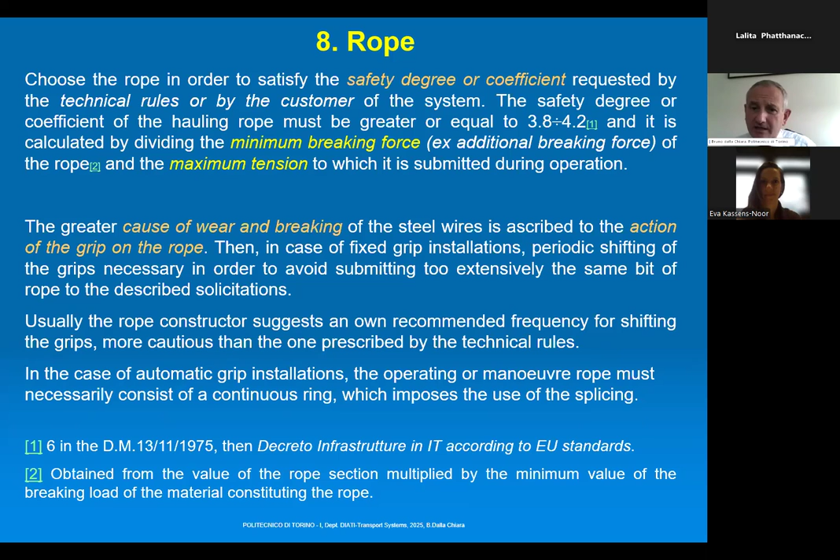As regards the rope, we calculate it with some coefficients that are typical of cableways, typically around 4, that is the ratio between the breaking force and the maximum traction applied to the rope itself during operation. To do that we have to calculate it, and we have to consider also the wear and the acceleration, deceleration phases typically in a station.

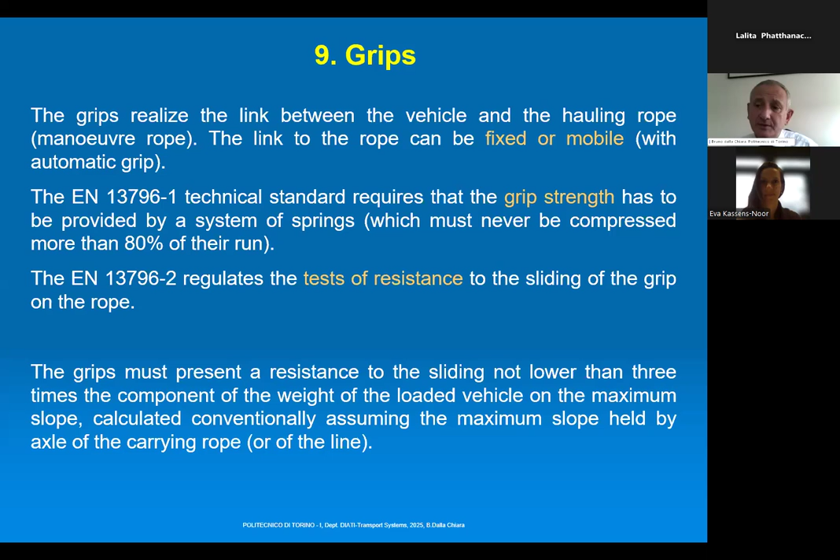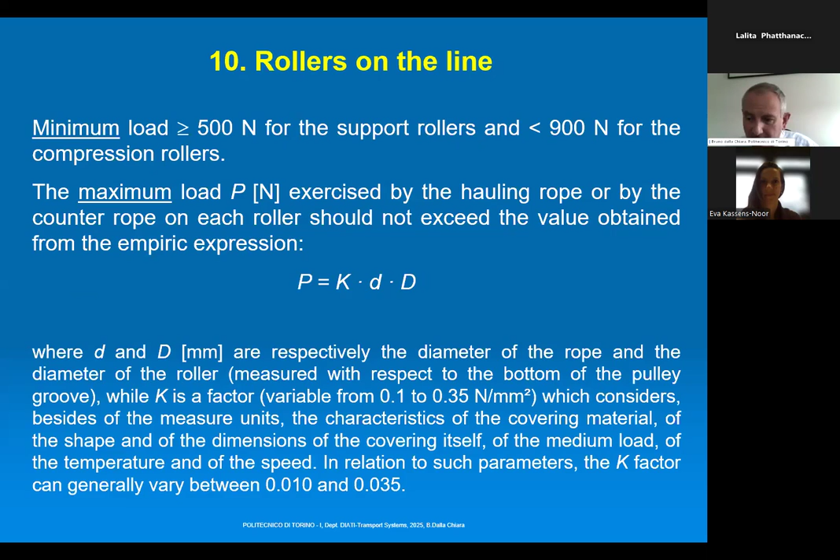Here you can see this rope has not to go outside the trace. If it goes, which could happen in exceptional cases, you need to place it again on the rollers.

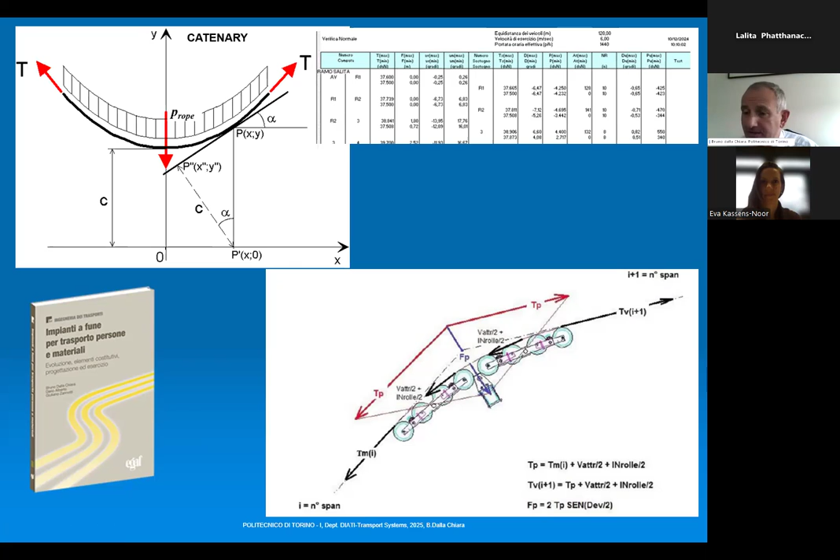From the calculation point of view, this is a text in Italian. Impianti a fune means ropeways for passenger and materials. Typically we apply the catenary function, and we can calculate the rope in all the different conditions. To do that, we have some instruments, software in particular, which allows for that.

So we calculate the line. We use these guidelines that I mentioned before for following the main elements, and arrive to the conclusion before some questions. I've seen that there are 3, but I didn't read them.

Typically, urban cableways are the most efficient in terms of energy. They don't create local pollution apart from very marginal aspects, and global emissions because they can rely on electric power, on an electric motor, which can rely on renewables. So this is excellent from the environmental point of view.

In terms of capacity, we are within 1,000 to 4,000, but we can arrive to 8,000, 9,000 passengers per hour per direction, which is quite more than a tramway, quite more than a bus line, and it avoids 3, 4 lanes of a road in terms of private motor vehicles. So it's very interesting.

Of course, there is a visual impact, so it has to be accepted. And in terms of safety, I didn't speak about that, but the safest installations in the world in terms of transport are the automated metros and the cableways.

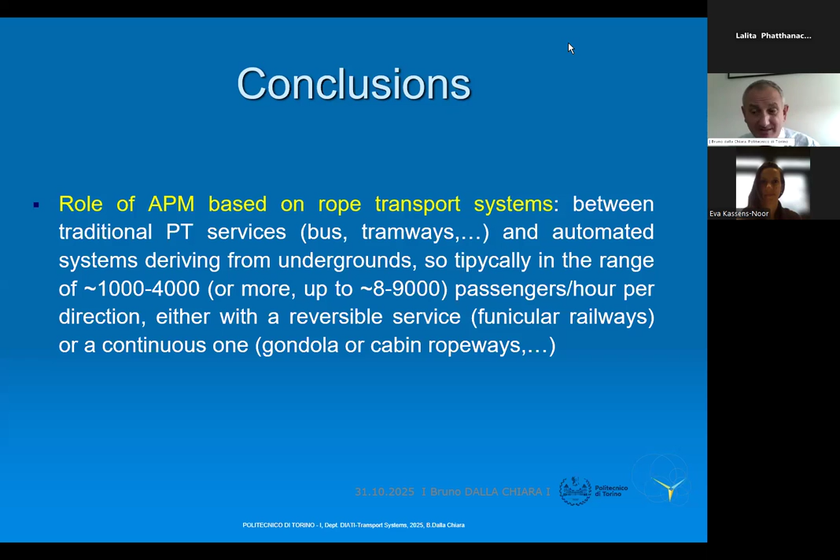If we look at the accidents, unfortunately, recently we had 3 important accidents in Europe, involving 14, 2, and another 11 people or something like that, but these were attributed to maintenance, not to the engineering and design, but to lack of maintenance. So I'm concluding.

I leave you some literature. Unfortunately, the book is in Italian, but there is some literature in English, and I leave the space for any question.